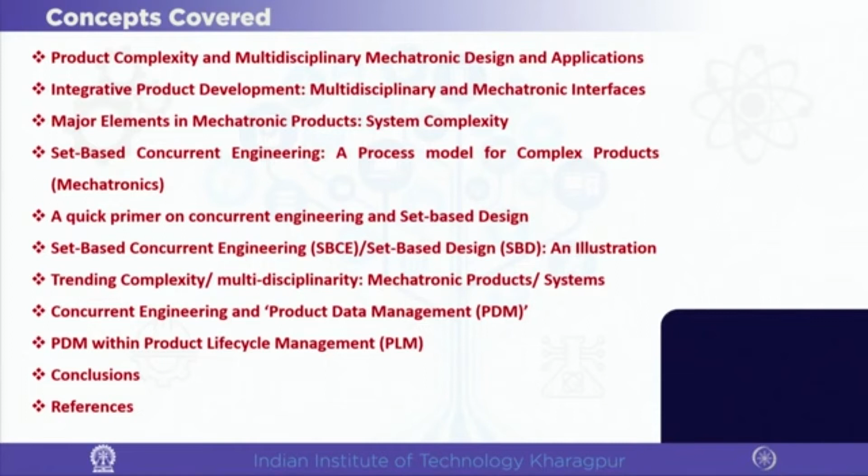With this short preamble, I will go into the content slide. Broadly, as I have mentioned, it is about product complexity in multidisciplinary mechatronic designs. So it is integration of various specialisms - integrative product development will be discussed.

Since we are particularly focusing on complexity, and multidisciplinarity brings that complexity more into the picture, we need to understand the systems elements, that is mechatronic systems elements, which we will discuss. Maybe it was part of your course already, but if not, for a quick understanding we will go through it briefly. If needed, you can go into further depth of individual elements.

Here, as we say concurrent engineering is one of the important pillars, we would introduce another concept called set based engineering. We will discuss this set based concept in detail. Set based means we are thinking of developing multiple sets of solutions in individual or separate specialisms or disciplines.

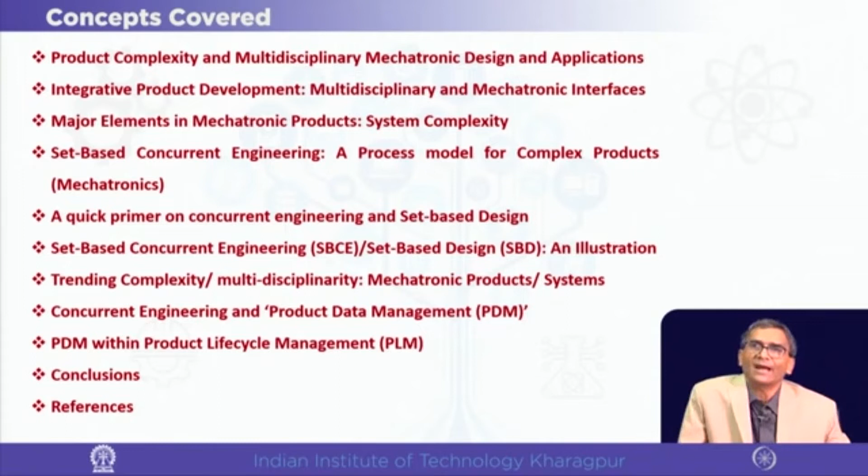So we go to the aspect that we were just mentioning, that now be it a consumer durable product, like say air conditioner or refrigerator or even fans, or it may be an industrial product. It is becoming more and more complex, and is more and more mechatronic, composed with mechatronic elements. Modern products such as mechatronic devices are multidisciplinary, and this actually raises the complexity.

Examples are plenty, and modern product systems such as conventional cars. We had seen that conventional cars are turning to hybrid electric vehicle or electric vehicle, where a substantial portion of the components are not mechanical but electronic and control system oriented. And also with computerized systems where the embedded or firmwares are being implemented.

So, starting from there, we can talk of high-end printers, medical equipment and instruments, and already I have mentioned about many durable items, consumer durable items also. So this associates all these technologies that we have mentioned.

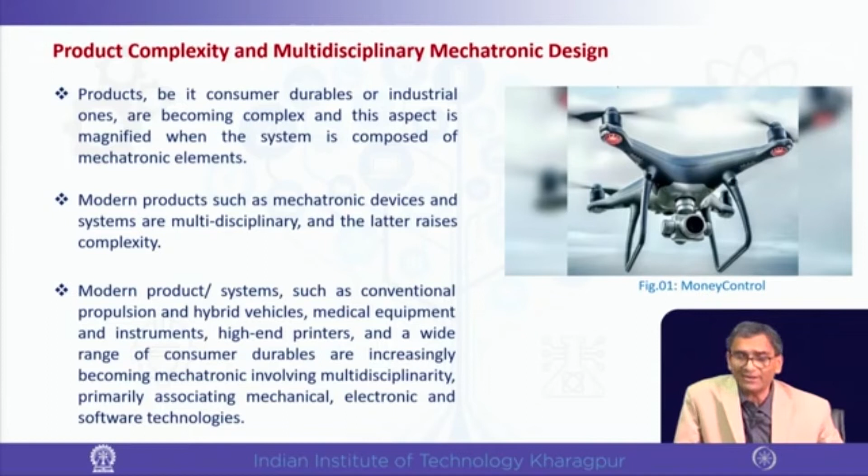Now if you just see, for example, in the consumer durable, I have already given the example, but you can study it later to get more details, starting from microwave, camera to washing machine, toaster, and air conditioner. In the medical, diagnostic and test equipment, pacemaker, assisted surgery. In automotive, I have already mentioned about this, but if we go to the control area, say cruise control, safety airbags, engine management which is called EMS, engine management system, power transmission, anti-lock brake, etc.

So these are examples of this mechatronic system in the automotive sector. In defense, unmanned vehicle is very common. You have seen in many situations, maybe during your course and studies, these unmanned vehicles both for the ground, underwater, air, and besides the regular things, say for example aircraft engines and controls, etc. are there always. In the manufacturing also we see the robotics, CNC machines, automated guided vehicles, in flexible manufacturing systems which carries the pallets from workstation to workstation, etc. Those are all examples of the mechatronic system.

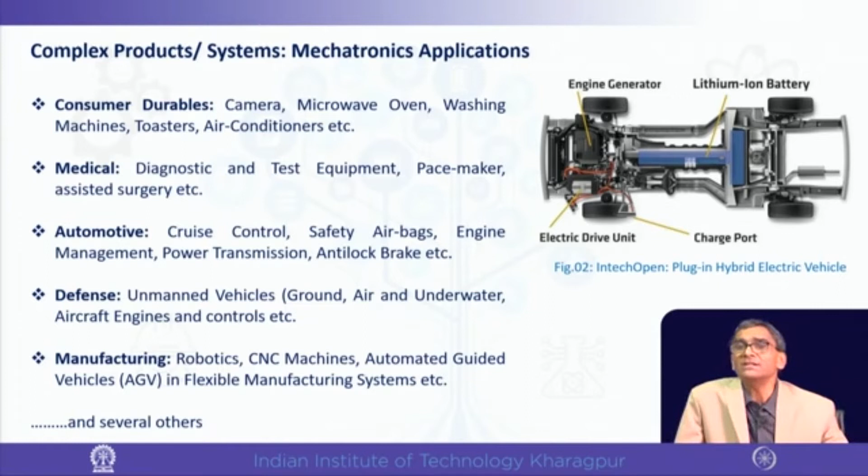Now you understand it is practically everywhere, and therefore we cannot escape the discussion on the complexity of design and development or product engineering in these areas. So how to address this? That is why we have taken up this topic, and that's why we will discuss concurrent engineering, more specifically set based concurrent engineering.

Having said that, let us understand the appreciation of multidisciplinary complex engineering system, that is mechatronics. As I have already said, the increasing incursion of IT in mechanical engineering imparts significant advantages. Sufficient information is coming, knowledge is coming, and that is creating significant advantages and benefits. And the discipline has evolved due to such a need and is termed as mechatronics, which can be typecast between two major continuums.

One is the spatial consideration. Spatial consideration means space-wise how it will be arranged within the system, that spatial integration of mechanics and electronics, such as MID, molded interconnect devices, like say the communication antenna within the switches, or within certain electronic devices. Those are the molded interconnect devices that we see.

Similarly, there is another part in that continuum, the other extreme, which is the control part, that control guided movement of multi-body systems. So this control part and the spatial arrangement part, these two actually are the two physical engineering challenges. The particular mix or combination of these two in varying proportions, somewhere more, somewhere less, or vice versa, in a product system is considered depending on the application and the associated design factors.

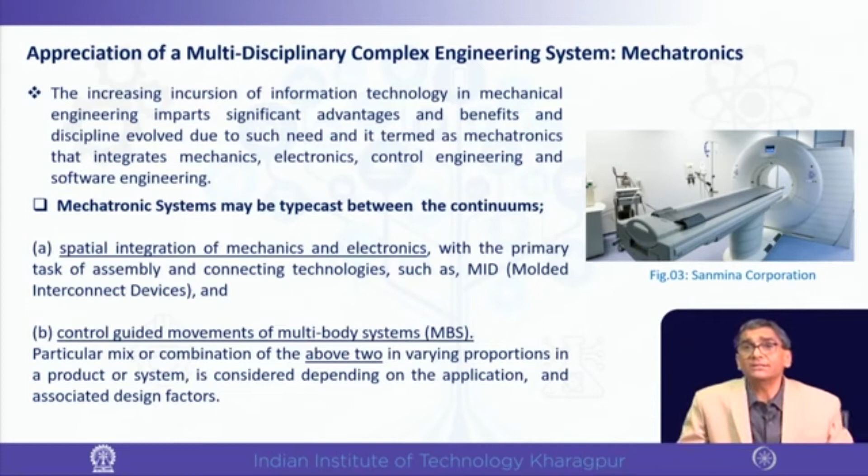Now, as I said, since there are multiple disciplines involved, automatically and naturally what comes in is the integrative product development consideration, and that brings multidisciplinary complexity. So engagement of interdisciplinary specialisms and experts is a complex task itself.

Complex in many ways: understanding the technology, understanding the nuances of technology and their interfaces, the communication, technical communication issues, and the preference of one technology over the other when optimality comes in. So all these make this consideration very complex.

Continual and effective interaction and sharing between designers and developers, therefore, from different domains during the entire product design and producing new manufacturing technologies is necessary because of this requirement. Particularly when there are weighty interdependencies. Obviously, now practically interdependencies are everywhere. When the interdependency is more strong or more weighty, then it is required even more.

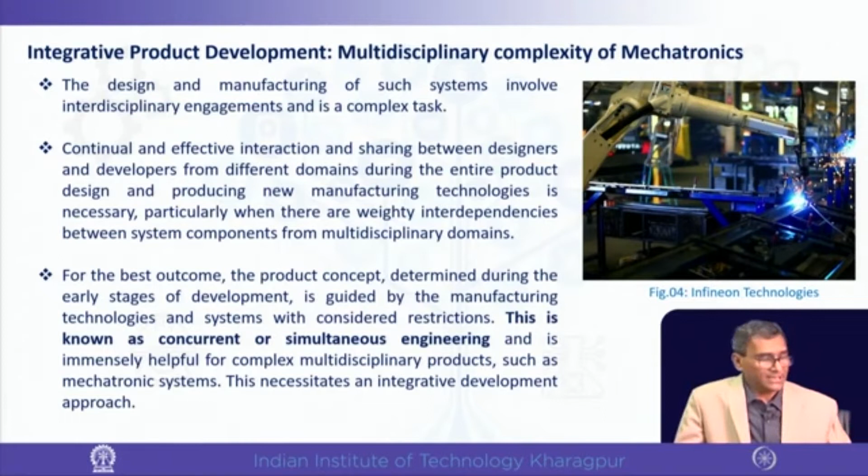For example, if one is changing a specification on data or feature in the electronic specialism, how is it going to affect the mechanical system, or vice versa—if a mechanical system is changing, how is it going to accommodate that electronic part or circuit in that package—is a major consideration. When these multiple things are to be taken together, it needs smooth operational necessity, and therefore concurrent engineering comes in a big way, which is very important for multidisciplinary complex products.

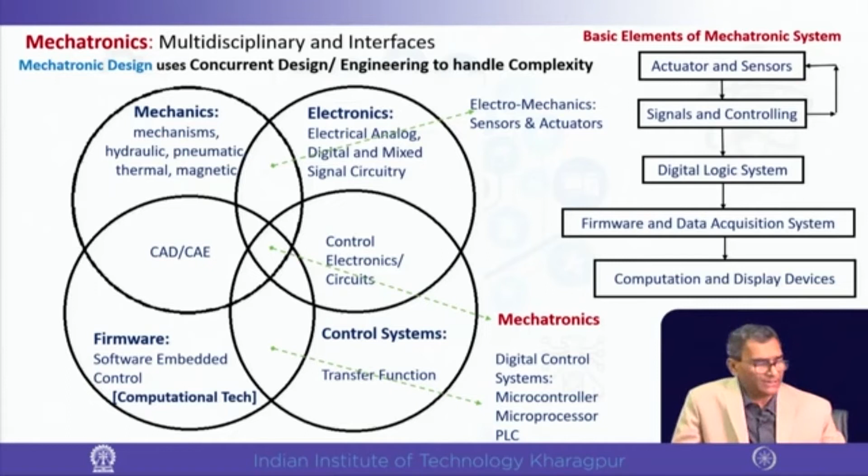We will talk about that, but let us go to the next slide where we find these different signals. One thing I would like to tell you is how the mechatronic system works.

What has been intended here in this discourse has been done very comprehensively—bringing the whole thing through one diagram, without missing any single aspect, is rather uncommon or rare, I would say. So we attempted to bring in one screen the whole thing of a mechatronic system, where you can see it basically has the mechanical system, the electrical system, the controller, and the display.

So here what we see is that on the mechanical system, there are actuators and drivers - it may be solenoid, hydraulic, pneumatic system, servo motors, stepper motors, or even DC motors - and that feeds to the sensor through the mechanism, which operates through certain displacement that it makes. So that mechanism changes, and that is sensed by the appropriate sensing system.

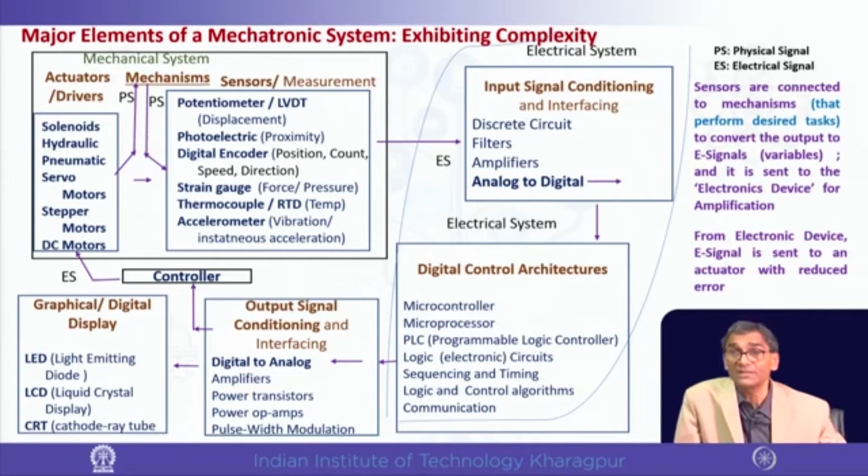Now once we are done with that part, we would go to, as promised, the set based understanding of set based designs. What is it? As I have already explained, set based design is where individual specialisms are creating different sets to be finally assessed, combining different possible sets for optimal performance.

So this was actually done in the Toyota company to start with. This was a part of their lean processes, one of the lean design processes, you may say. So that is where the set based design differs from the traditional approaches.

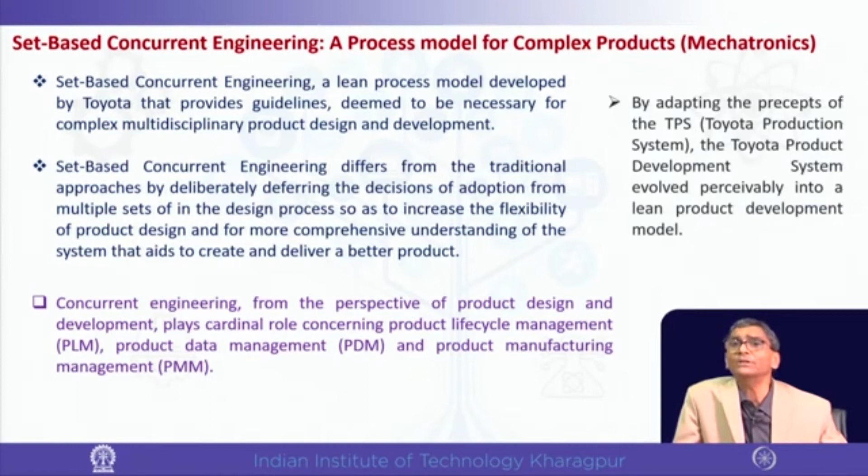I have already discussed the PDM, product data management, lifecycle management, and also product manufacturing management, where we see CAM, computer aided manufacturing, comes in. But our focus will mostly be on the design development part. CAM is also important, and PMM comes in when we talk about the complete manufacturing of the product.

Now, a quick primer on concurrent engineering and set based design, very quickly, as I have already explained, so I won't spend much time on this slide. It is not sequential; it is being done concurrently. Each specialism is interacting directly with the other specialist subgroups. The product design has to be in sync with the entire continuum of product ideation to launching in the market, end to end. So everywhere, all these functionalities starting from ideation, conceptualization, prototyping, and finally manufacturing are connected.

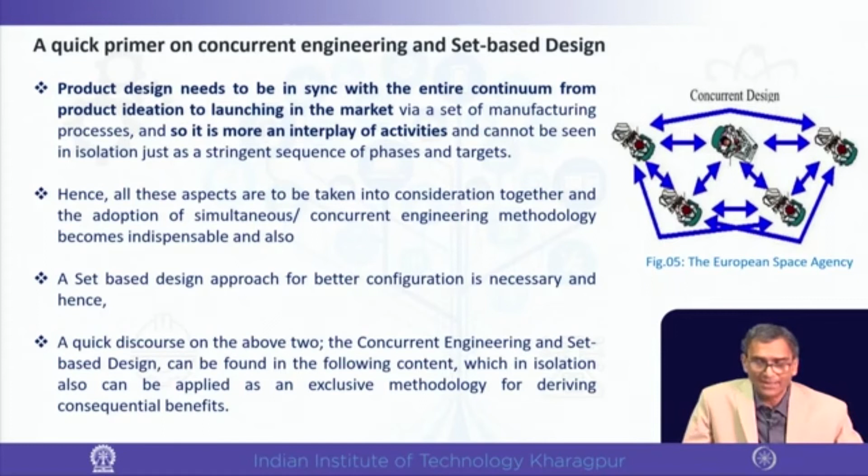I would like to first go to concurrent engineering and what it affects. You can see these two bars at the bottom. The lower bar is sequential engineering. The legends show deep blue as product definition, green as design, gray as verification, orange as prototype, red as redesign, re-verification, re-prototype, etc. Deep gray is test generation, blue is production, and yellow is test. So the total time required in sequential engineering is shown pictorially.

Now, if we practice concurrent engineering, doing many things concurrently, the need to revise, redesign, re-verify, and re-prototype can practically be done away with. Looking at the diagram again, that red portion representing redesign should pass and go in one go properly, because we are already interacting throughout. It is not that an electronic circuit is given and the mechanical specialism says it cannot be accommodated, or vice versa. Since we are going concurrently, corrections are done during the process itself, from the beginning, saving all the time for redesign, re-verification and re-prototyping.

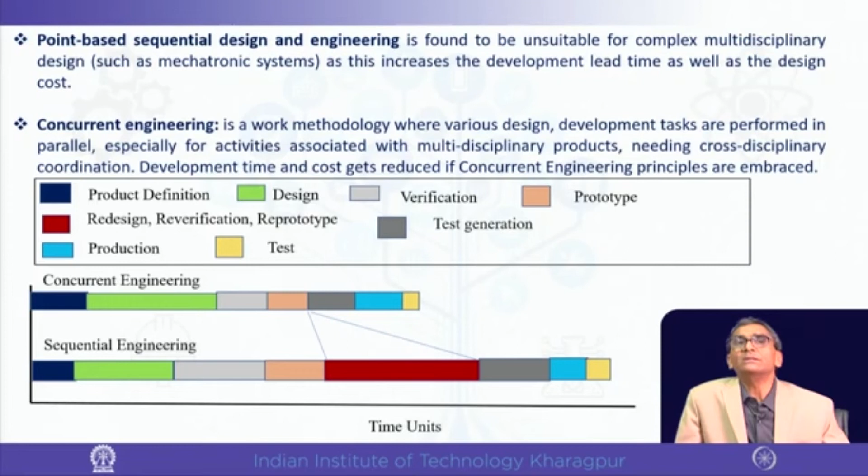We will see that in concurrent engineering there are point-based and set-based designs. Point-based means, say, functions A, B, C, D going sequentially in sequential engineering, not concurrent. In concurrent engineering, if it is point-based, the design solution of function A is analyzed and critiqued, meaning commented on for its failure possibilities, disadvantages, shortcomings or pitfalls, and then modified accordingly to suit function B, C, D and whatever follows. So point-based means A is corrected and accordingly B, C, D get satisfied.

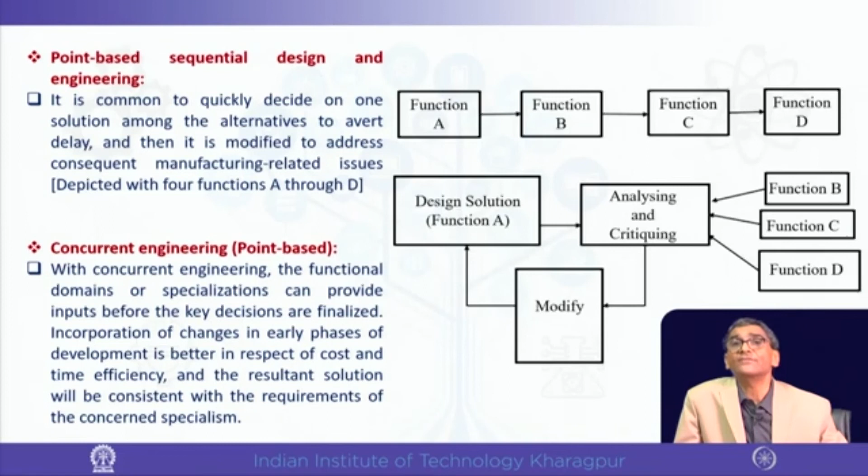But in set-based design, as you can see in this Raudberget figure, individual specialisms of different colors have different sets, and through various layers they are brought closer together to see how the sets in individual specialisms match, with their intersection giving us the final design set. This is called set-based concurrent engineering, or SBCE, also called set-based design or engineering. Initially it is defined broadly and subsequently narrowed down. That is the set-based concept.

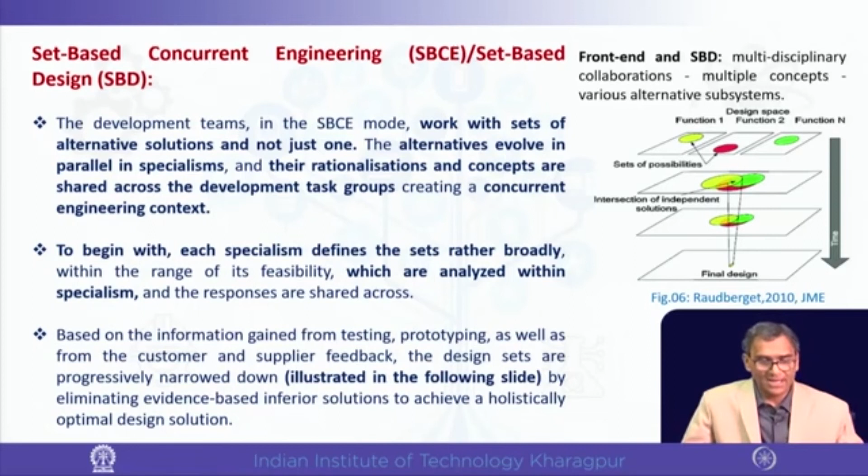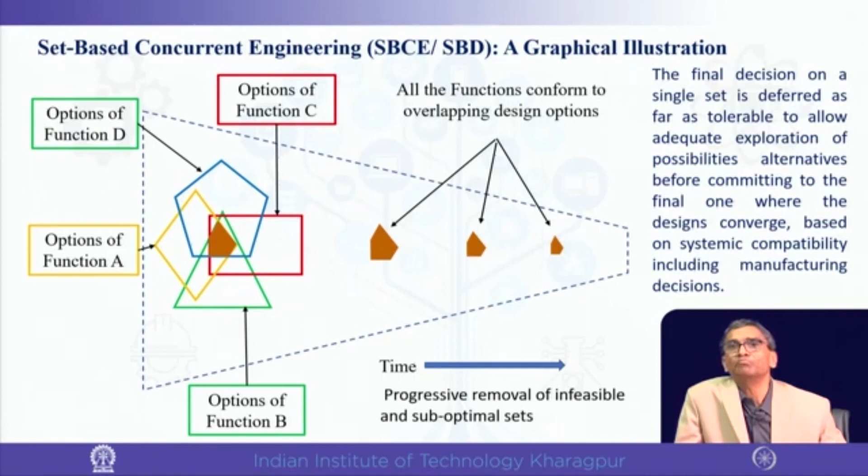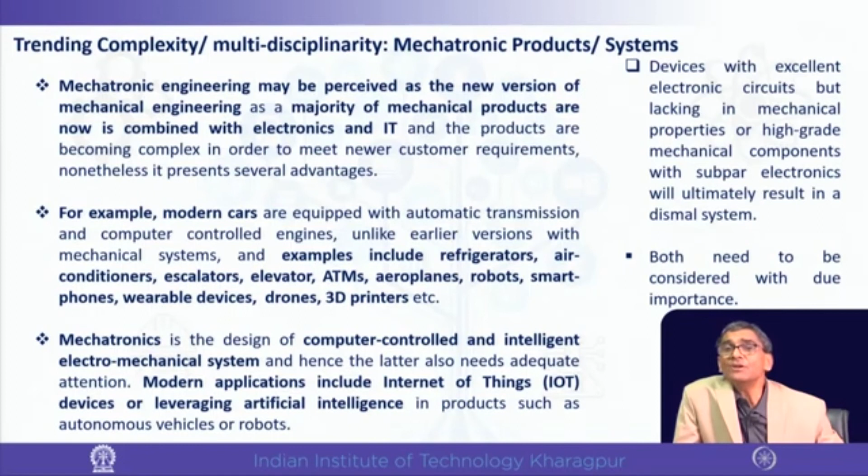If it is good in electronic but not mechanical, or vice versa, it will not work.

Now, we would talk about some things because after all it is a question of career. If you want to build your career in mechatronics, what kind of skill set would you require? So, here is a certain list of software that you can see.

In different domains, one thing I will tell you, in CAD software you have SolidWorks, CATIA and all, and simulation software, ANSYS, MATLAB and various others.

In programming languages, C, C++, Python, and Arduino, Atmel Studio, and those are there. In Fluidsim, Multisim, both will satisfy the requirement of pneumatic, hydraulic and electronic basic sensors and controllers.

And for mechanical modeling, mechatronic modeling, you have Modelica, or there is an open source Open Modelica, or things like KiCad, etc., Octave, etc., and also Enovia is there.

One thing, don't get scared with this big list, so-called big list. Many of you already know. The thing is that the entry-level mechatronic engineer is not expected to know everything.

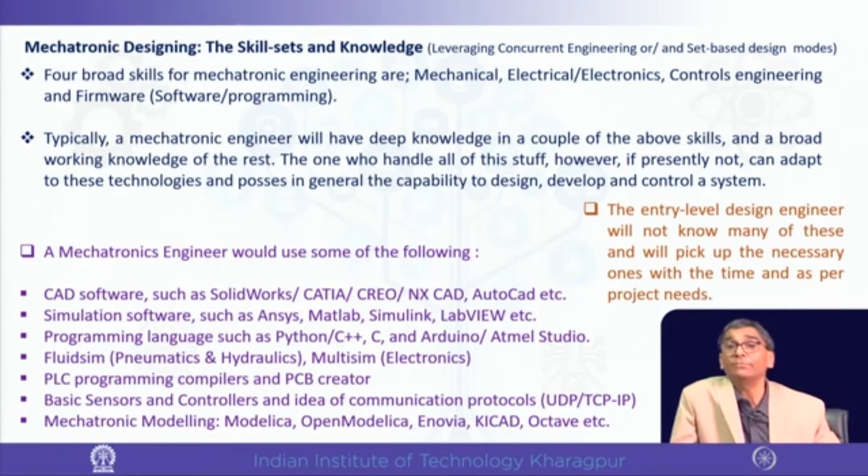Therefore, I have written it in this orange color. If you see, the entry-level design engineer will not know many of these and will pick up the necessary ones with time as per project needs. But then some basic things will definitely be known to him, he should learn.

And so, we will come back to the last part of this thing, that is PDM. We have already discussed that PDM is actually a platform, etc. We will talk about it again, that it is an electronic data management system.

We will give certain reference of the software or platform available for this. Product data management is the technology and supporting software, as well as centralized database system, that aids the effective implementation of concurrent engineering. That is in a nutshell what it has to say.

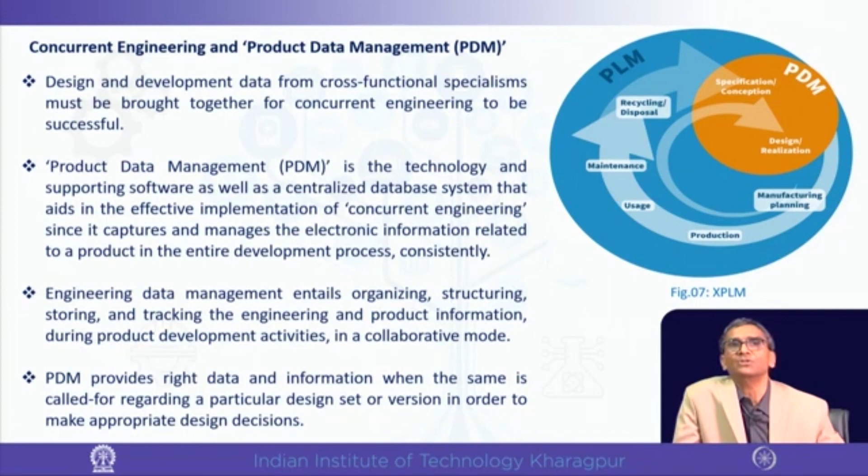And PDM is within PLM. Now here, as we see, this particular slide is as I have already discussed on the left side, but on the right side

I would like to tell you a good news that there is a free learning resource, an ANSYS student download link which has been provided here, that gives huge inputs, from mechanical structure to CFD, LS-DYNA, SCADE, which integrates model based design, simulation, code generation, etc. So, this will be immensely helpful.

So, I suggest you go to that site, download some of the software, try it, and whatever you already know well, you can keep on adding things, because those are the things you will be learning on the way in any case.

I have actually touched upon these things, named the software, so at least you should know where to get it and for what. So, we have covered the mechatronic issues, the complexity issues, we have covered the set-based concurrent engineering for reasons, and finally how the concurrent engineering will happen effectively.

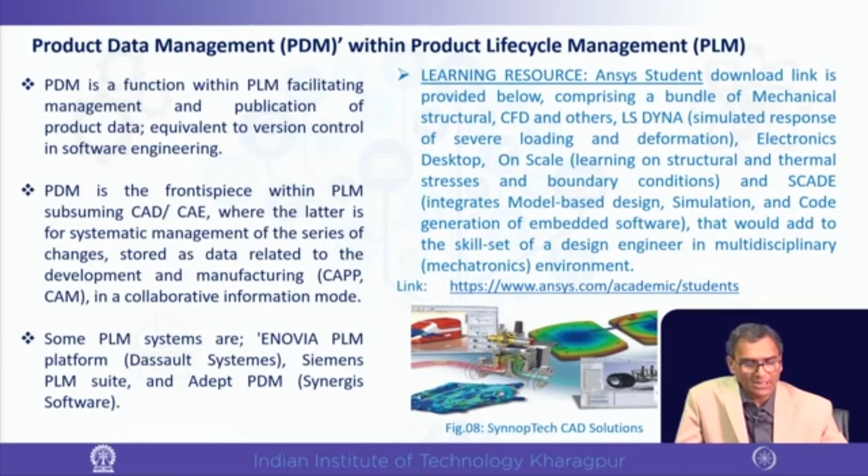For that we have talked about the PDM system, and this PDM system, a name I have already mentioned, this Enovia PLM platform, Siemens PLM suite and Adept PDM software, these are certain available things, and so you can always refer to them.

So, in the reference you can see the reference is given, and I am sure that this gives you an idea as to, for multidisciplinary complex systems, how to approach and how to find the skills required to do this and how to learn it, because certain references are also provided.

Hope it will make you a great designer. Thank you very much.